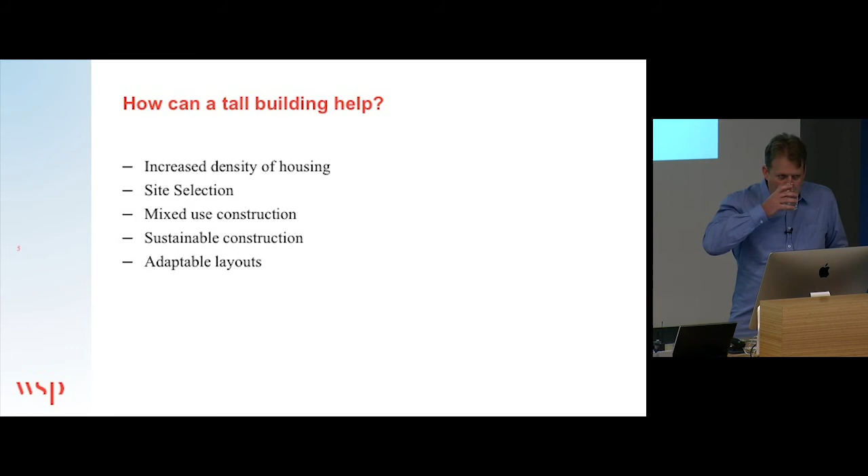So what's a structural engineer going to do about this? Throughout the design process, we provide advice to our clients and the rest of the design team about what are the most structurally efficient choices to make.

We generally base our recommendations on our past experiences and then confirm them with analysis. This bias can sometimes mean that we overlook alternatives that can have a greater overall benefit to the community.

Most of our decisions are based on considering the short-term costs in terms of the cost of materials and the cost of construction. To be fair, these are also the main concerns of our clients, and so we're generally acting in their best interests.

It is likely that clients may need external motivations to encourage them to consider long-term community benefits, and I'll touch on that at the end of the presentation.

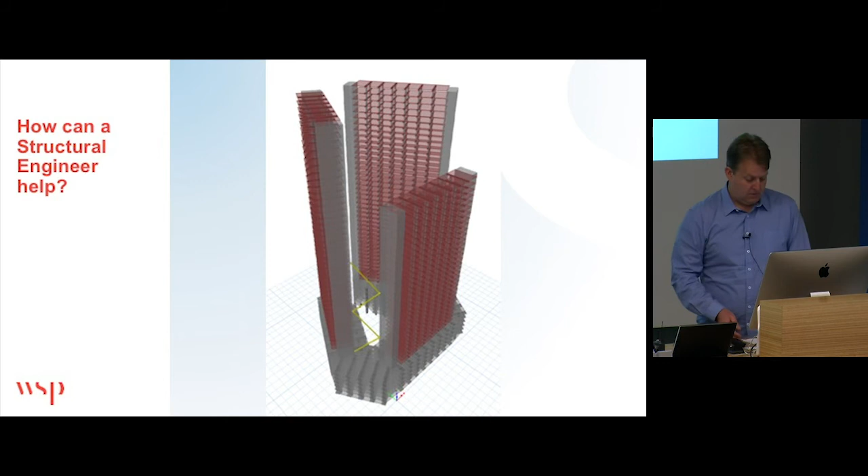One of the most obvious benefits of high-rise residential towers is the ability to increase the density of housing. A 70-storey tower can deliver 600 apartments on a lot size that may only contain 2 dwellings in suburban Melbourne. This more efficient use of space should help to increase affordability by providing alternative options for people to live close to their place of employment or study.

The effect of increased density is a two-sided coin for infrastructure and community services. Having increasing density concentrates the requirement for such public infrastructure, allowing it to be delivered more efficiently than in areas of urban sprawl. However, a dramatic increase in housing density in a particular location can lead to problems with there being adequate services for residents. It is therefore important that the government works with developers to provide upgrades to existing infrastructure and services when required.

Two of the key challenges for new apartment buildings is to provide quality housing that suits different sections of the demographic and to help develop a sense of community among residents. From my own experience living in apartments and from speaking with friends, it is difficult to get to know your neighbours in many apartment buildings where the majority of the shared space is the public corridor with a whole heap of closed doors.

This increased density, particularly if done in a sustainable manner, can provide a solution for accommodating the growing population of Melbourne without creating further urban sprawl.

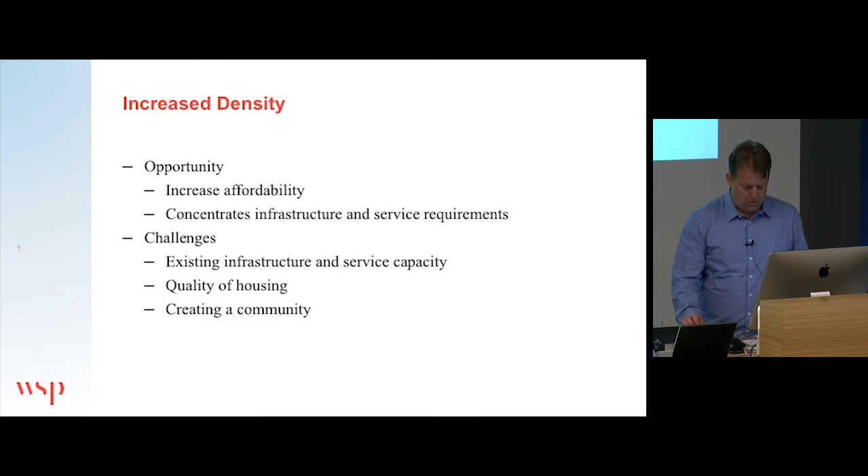There needs to be due consideration given to where it is most appropriate to locate a new high-rise building. Planning provisions generally restrict tall buildings to the City of Melbourne, with the majority in the Central City, Docklands, South Bank, and moving forward in the Fisherman's Bend area of Port Melbourne. However, within the Central City, suitable sites are limited due to existing and adjacent buildings.

The yield that is possible from a tall building can help to make feasible more difficult sites. One potential is to build over existing rail yards within the Central City. This delivers a better outcome for the community as it better utilises existing space, helps to better connect the city, and conceals a potential eyesore.

For the building being presented today, it is proposed that it could be located on a site in the southeast corner of the CBD, over rail lines and Wellington Parade. Beneath the ground in this area are 2 of the tunnels for the city loop that Richard was talking about earlier.

Wellington Parade is not a critical part of the road network, so it could be temporarily closed during construction and reconfigured to suit the new buildings. The size of the site provides several options for locating tall buildings, with opportunity to provide adequate support structures for such buildings.

One of the reasons I looked at this site was that Federation Square was a built-over rail project that happened here. And there's already a lot of plans for what they're terming Federation East, which is the next chunk of land over the railway, so I probably will call this Federation Square Far East. Looking at the options here, we've got the park to the north and Birrarung Marr park to the south, so there's an opportunity to create a connecting corridor between those 2 green spaces.

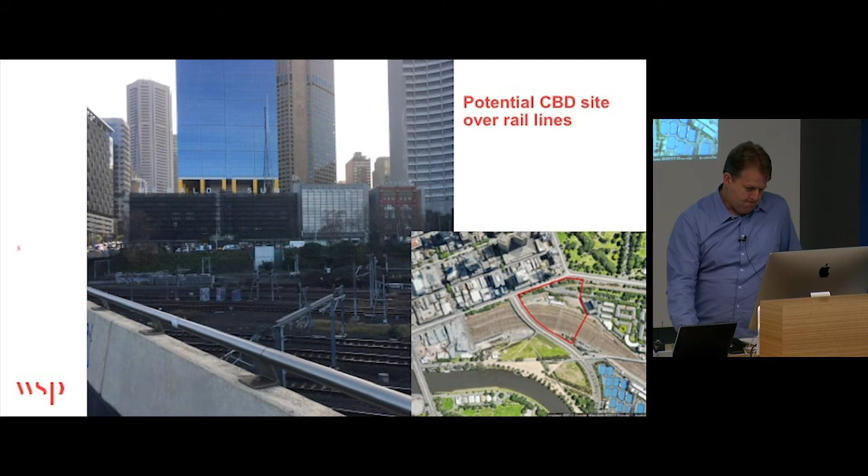So this site provides many opportunities for future residents due to its prime CBD location. It has close proximity to public transport, places of employment, and easy access to major universities and hospitals. It is close to both the established Fitzroy Gardens and the new Birrarung Marr Park, as I pointed out.

The key challenges will be constructing over the existing rail yards and City Loop train tunnels. However, this is something that has already been done at the nearby Federation Square and at Media House near Southern Cross Station. With a tall building on the site, careful planning would need to be made to provide load paths for the main columns and cores onto crash walls and similar supporting structures between the rail lines.

It's common to consider mixed-use construction with high-rise buildings. Most recent apartment buildings in Melbourne have limited retail space in their lower floors, with the podium generally filled with car parking and additional apartments. A tall building that is trying to deliver better community outcomes could utilise the podium to deliver services for the community, such as health or education facilities.

In addition, there's an opportunity to provide public facilities at both the top of the podium and the top of the building. Providing a green roof on the podium tied to internal community spaces and a facility such as a library at the top of the building would help to create a better sense of community within the building. These spaces could be utilised by students if there is a vertical school also located within the podium. The full deck across the rail yards would provide additional ground level space for retail spaces, parks and other community recreational spaces.

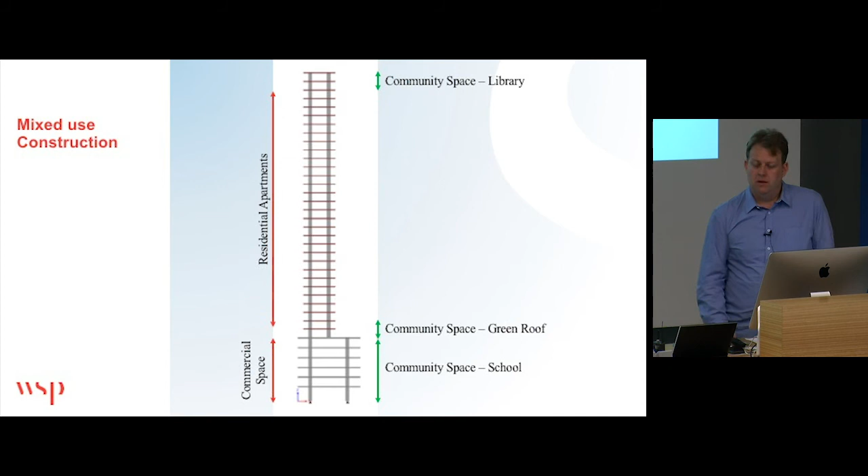But what about the other 60% of the apartments in the building, which are left with no natural ventilation and also a reduced amount of natural light? By working with an efficient structural layout, we are left with inefficient, single-sided apartments with a reliance on artificial light and ventilation.

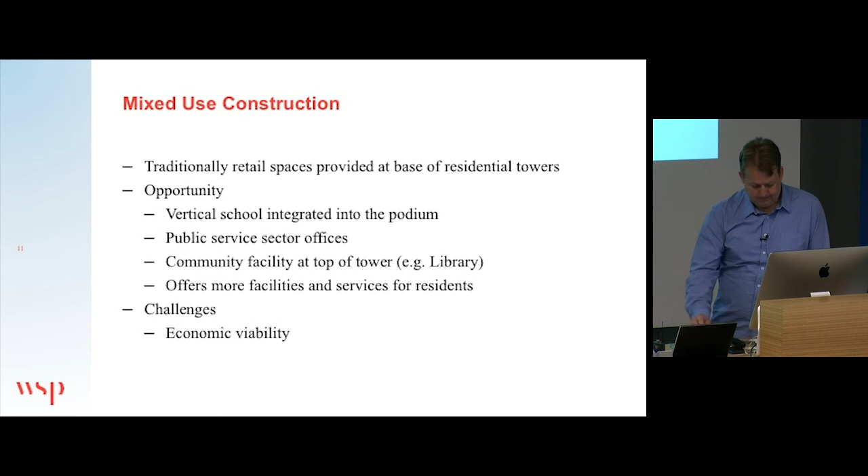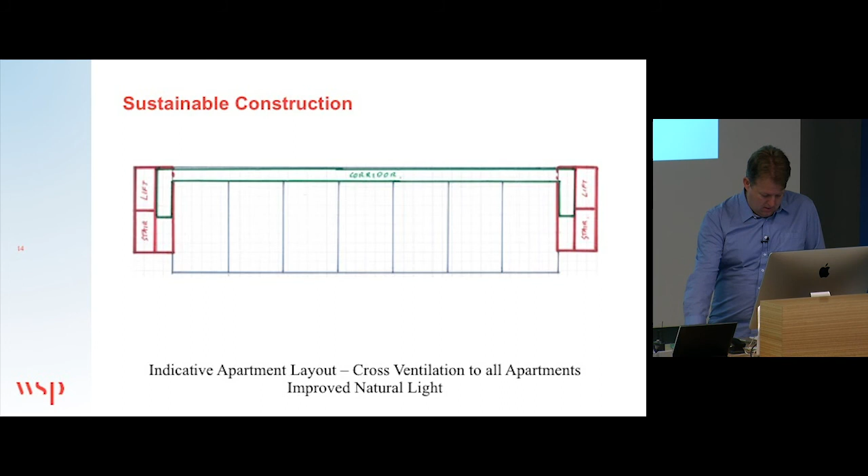So how do we improve the stiffness of a very slender tower? We can put a group of them together. So as an indicative layout, if we put 3 of them in a triangular type formation, and we could tie them together with bracing up to a certain height, and basically engage the 2 cores.

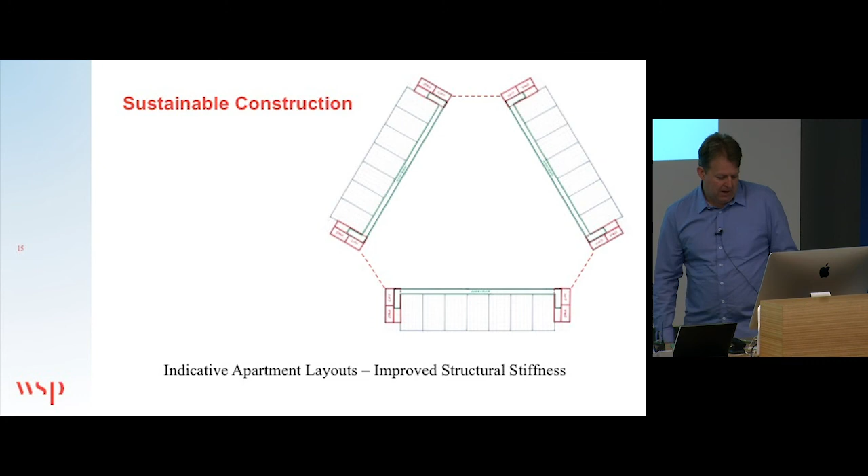So this layout would deliver both the efficiency and still maintain that natural light and ventilation to the apartments. The one major obstacle with this new layout is economic viability. So I'm now getting a much lesser yield out of a similar size site.

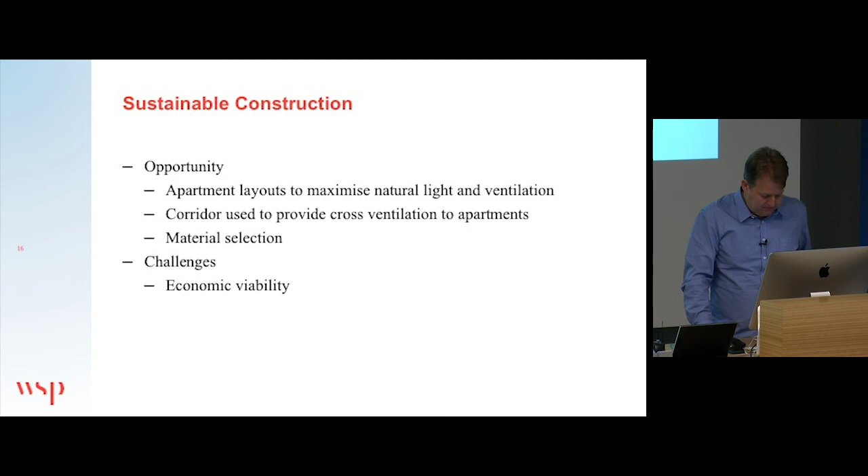You could have operable louvers to the corridor, which could be controlled by a building management system that helps to maintain a constant temperature within the corridor, and then leave it up to the apartment owners whether they choose to open their windows and allow cross ventilation through their apartments.

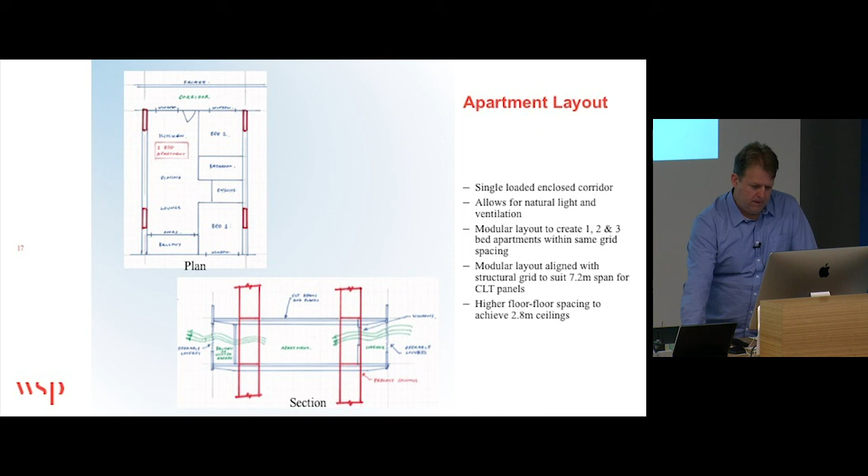So by working with a modular layout, with a spacing of about 7.2 metres for the columns, we can also fit 1-bed, 2-bed and 3-bed apartments within the same grid. This allows a modular layout that means you can, at a future stage, if you choose, rearrange the layout of the building to better suit a changing demographic.

So basically it gives you an opportunity to deliver what some people term the cradle to grave solution. So you can be growing up in one of these apartments, you might downsize through your 20s and 30s and then upsize again once you're a family. And perhaps you don't want to spend your entire life living in one building, but it's the concept that you can have that mixed demographic located in one building.

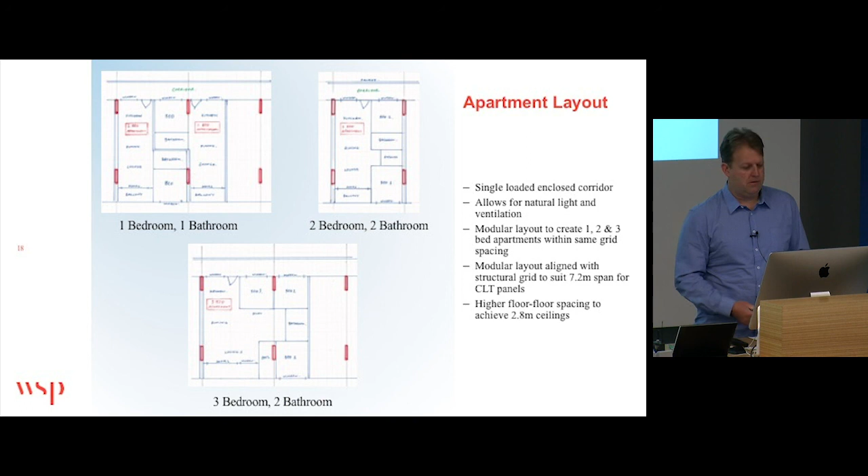So I didn't only want to consider the structure of the form of the building, I want to also consider the materiality. So what I think would be a better sustainable solution would be to use a CLT solution. However, I don't want to just throw out all the structural efficiencies that I'm used to in a concrete building.

So I would propose that we'd go with a concrete core and precast columns, and then utilise timber CLT beams and floor plates. This will help deliver a more carbon neutral building, yet does not have the restrictions of oversized CLT columns.

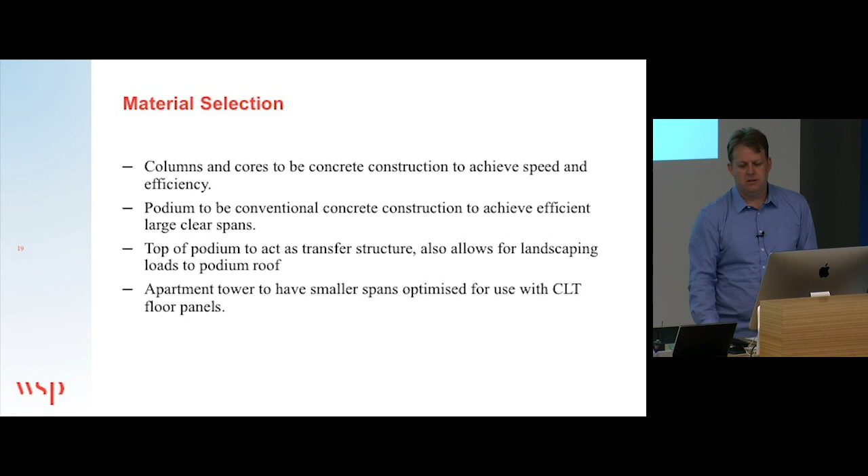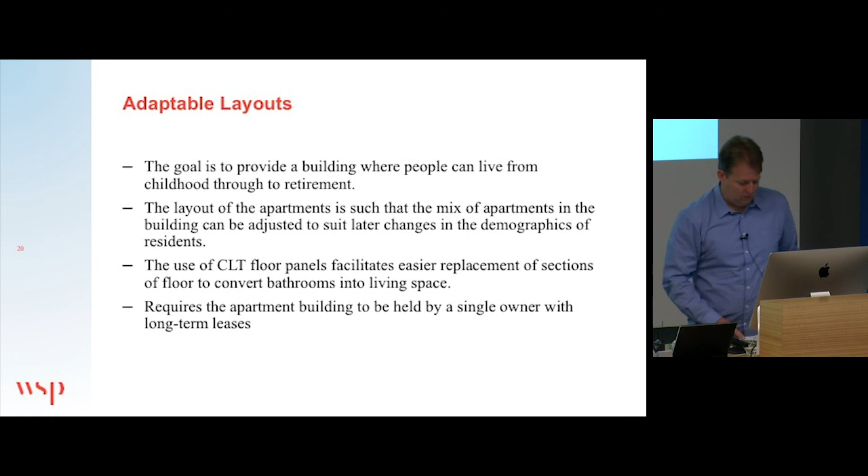So I've already spoken about the adaptable layouts and I am running out of time. So I would like to finish up just talking briefly about the financial considerations. So one of the recurring challenges with this proposed tower was economic viability. Unfortunately, the long-term community benefits of providing a more sustainable building design do not normally figure into the financial calculations of developers.

Some of you in Sydney may have heard Derry Yu from New World China Land quoting a 50 to 80 year return period for the return on investment of some of the super tall towers they are developing. Most residential developers have a much shorter term outlook.

In my opinion, it falls to the government to determine how important these sustainable measures are in terms of community benefit. They have the opportunity to then regulate for developers to include them or make the investment themselves through a public-private partnership. At the start of the talk, we identified affordable housing as one of the threats to Melbourne's status as the world's most livable city.

While the proposed tower delivers a better quality apartment, it is likely to be at a much higher price point, even if it is economically viable. To truly address the issue of affordability, it would also require intervention from the government. It could be part of the conditions placed on the consortium given the rights to develop the entire site. Exploration of these options is outside the scope of this talk, and it's clear that further work is required.

What I'd like to leave you with is that there is more that structural engineers can do to help deliver better housing with long-term community benefits. We can start by not jumping to the most obvious efficient structural solution and look outside of the box.